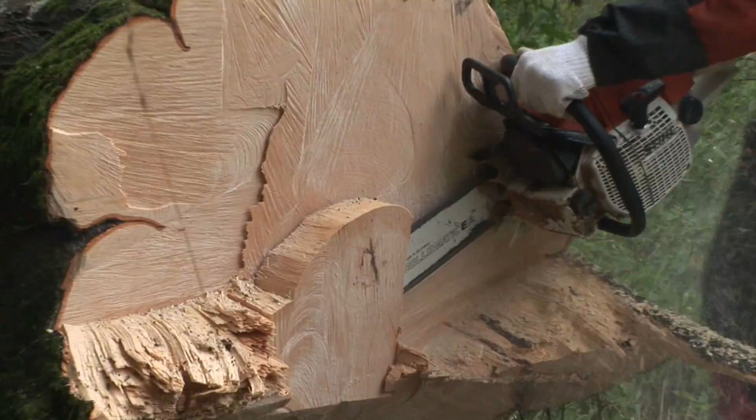Plant photosynthesis is using the sun as a kind of engine to form an organic substance, which in the form of wood was man's original energy source. This substance is biomass that since our prehistoric times has given the inhabitants of Earth energy to light, heat and cooking. Biomass, such as wood, has been used for energy purposes ever since mankind learned to control fire.

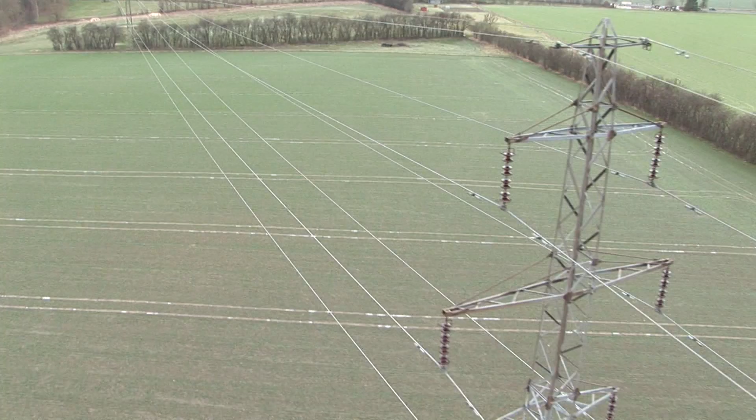And biomass is renewable because we can always grow more. 80% of the global supply of renewable energy is derived from biomass, and it represents 12% of our total energy consumption worldwide. 12% is also the figure for the gross inland energy consumption of the European Union that is to be covered by renewable sources of energy by the year 2010. To meet this goal, intensified use of biomass needs to be made both for heating purposes and for power generation.

But biomass is still not a word that is commonly known. Very few people would actually know what it really was. But then when you started to say, it is the sort of products of farming that can be used, they will all know what the products of farming are. I mean, they're all very familiar with straw, they're all very familiar with wood shavings and even energy crops, of course. But biomass is not a word in particular that's commonly known.

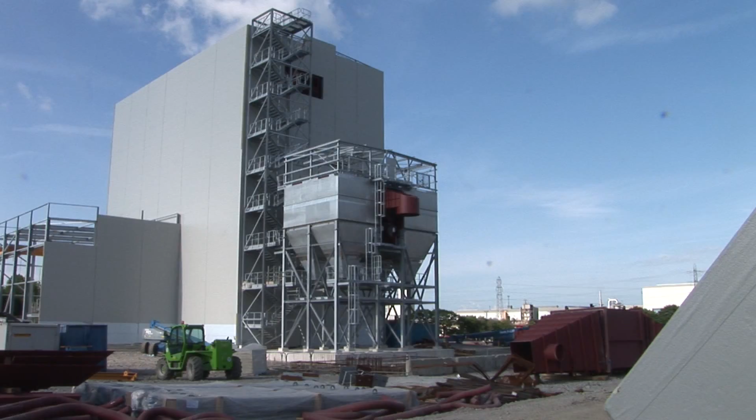The past uncertain factors surrounding the use of biomass for energy purposes are now virtually eliminated. Therefore, the way for transformation has been paved, and the optimal use of biomass has a significant impact on energy, agriculture, environment, economy and employment. Several biomass plants have now been established in large parts of Europe in both public and private ownership, and the development of better construction continues at a high pace.

Among the renewable energy sources, wind and biomass are the two with the most potential. All of the other renewable technologies to date are intermittent. They follow their resources. Wind will be intermittent, solar will be intermittent, hydro will be intermittent. This is a nice baseload technology which can be relied upon very much.

The one thing you cannot do with the wind is to guarantee that it will be there when you need it. The other thing, because it's baseload, for the same amount of capacity, you actually get far more electricity. And we're finding that roughly a factor of 3. I mean, the same capacity biomass can produce 3 times the energy of the same capacity wind farm.

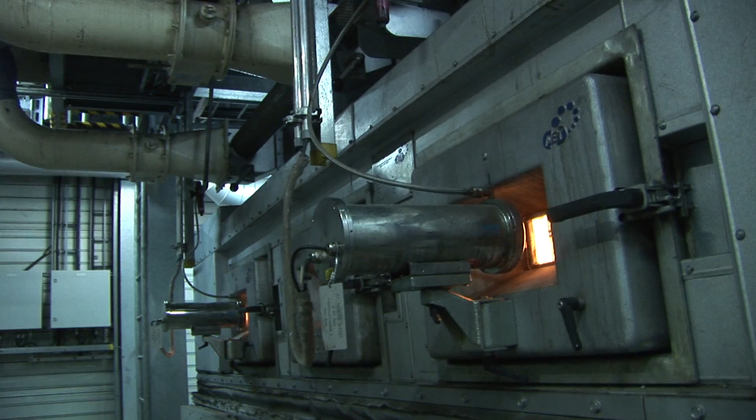Biomass can be converted into electricity and heat. Compared to the fossil fuel sources, it can be much more evenly distributed. Over the last 10 years, more than 100 biomass-fired power plants with high efficiency and reliability have been built in Europe. Combustion is the most widespread biomass conversion technology for energy purposes, primarily for heat generation. This typically takes the form of either combustion plants providing heat for individual consumers or facilities supplying heat to district heating schemes.

Power generation from biomass combustion is usually steam-based, utilizing steam turbines for the conversion to mechanical energy. The large investment cost associated with this technology makes it less attractive for small-scale installations, and it is therefore mostly applied in relatively large plants. Frequently, it is operated as co-fired schemes, utilizing biomass in combination with other fuels, for instance, coal.

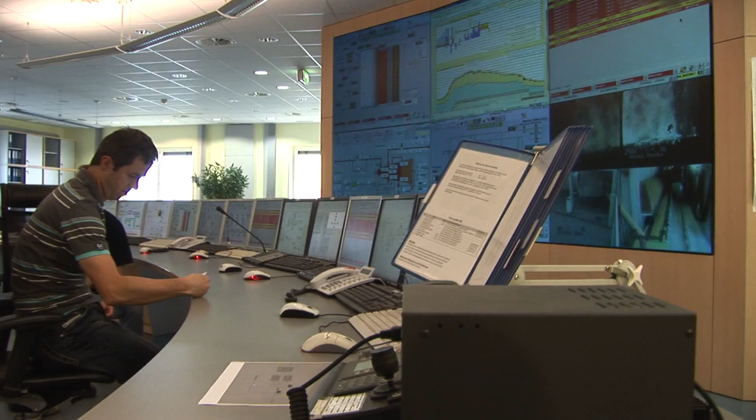For power generation, as well as cogeneration schemes on a smaller scale, alternative routes are being pursued other than the combustion and steam turbine combination. Usually, the objective is to convert solid biomass into fuels that can be used in engines or gas turbines. The EU described its targets for renewable energy in the EU White Paper on Renewable Energy Sources, published as early as 1997.

A major barrier to increased use of biomass is based on price policy between fossil energy sources and biomass, as well as in tax structures across Europe. Despite the barriers, there has been a tremendous development in biomass utilization.

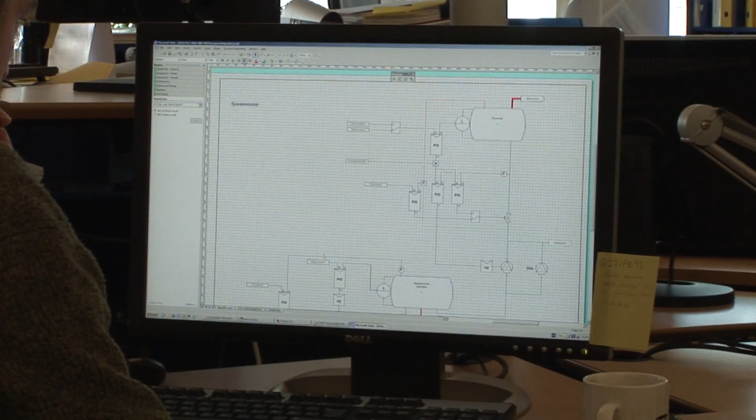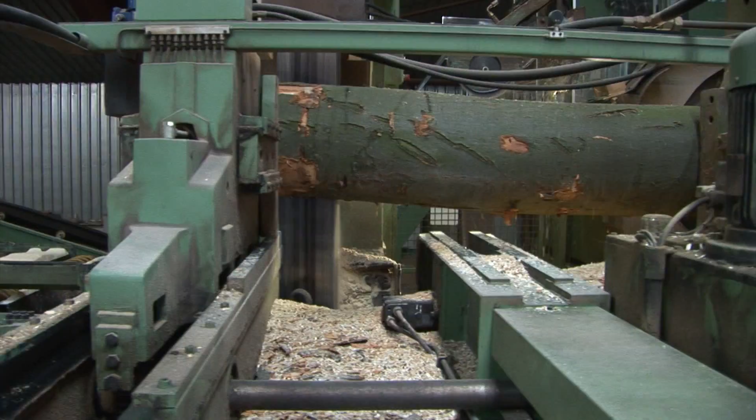One of Europe's most active and productive centers of energy science is located in the northern part of Jutland in Denmark. The company Aalborg Energie Technik has developed a massive knowledge base that ensures the design, sales, construction and startup of process, steam and cogeneration plants. These plants are primarily fired by all kinds of biomass, including wood chips, wood waste and wood dust.

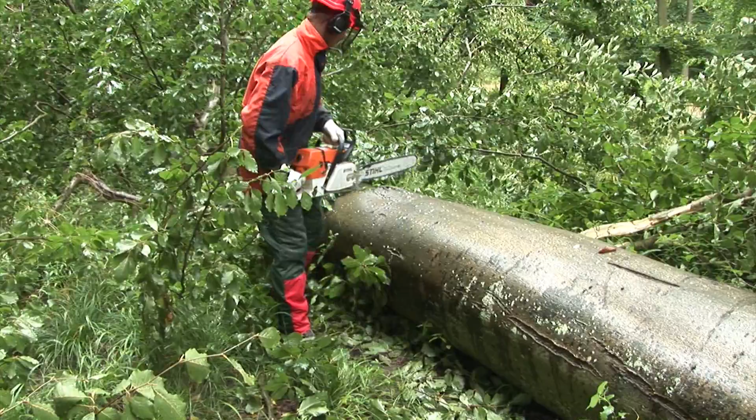In most countries of the European Union, wood plays only a minor role beyond its traditional use in rural areas. Scandinavia and Austria are the exception to this rule. For instance, the town of Linz started up the largest biomass facility of Austria in October 2001, thus making a sustainable contribution to improving local air quality.

In Austria, the introduction of small-scale biomass district heating plants has been a resounding success. The Austrian government has backed the use of biomass derived from industrial wood waste and wood from forestry. Using wood as a fuel is the most efficient way of using biomass as an energy source, as the cost of wood is much lower than fossil fuels used for domestic heating.

The city of Linz has 200,000 inhabitants, and we were always trying to find the energy system for the diversification of the fuel. So we were using a lot of oil and gas for the power production of electricity and district heating. Our main source for the biomass plant is untreated wood. This untreated wood is coming direct from the region.

So we use now a part of logs because we can make the transportation cheaper for the logs. Then it dries up a little bit. Then we take sawdust and all these things which are coming from the industry. And on the other hand, we also can fire bark and other rests of untreated wood. What is important for this plant, we only use untreated wood.

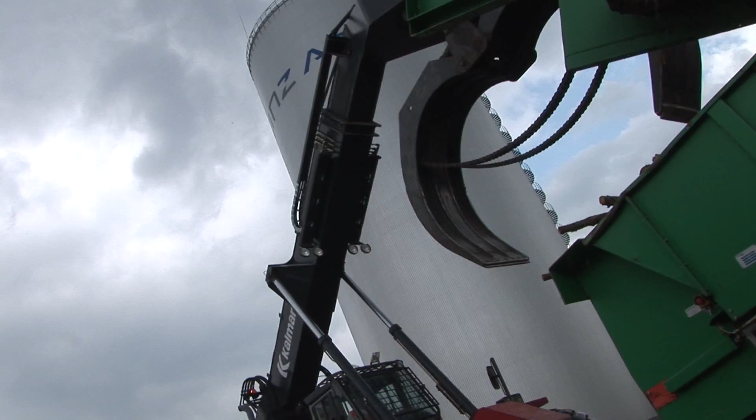We're getting the logs by ship, train or by lorry. We're bringing it to our storage area because here we have a little buffer size, maybe up to 3 months. So if there is no transportation possibility or it's in winter time, we still have the logs on our storage area. And on the other hand, it has a big advantage.

The sun and the weather is drying up our wet wood because the wood, when it's fresh, has up to 50% water content. It dries down, maybe when it's laying 1 year here, it only has a water content of 30%. So it's better for the energy production or for the efficiency using dry wood.

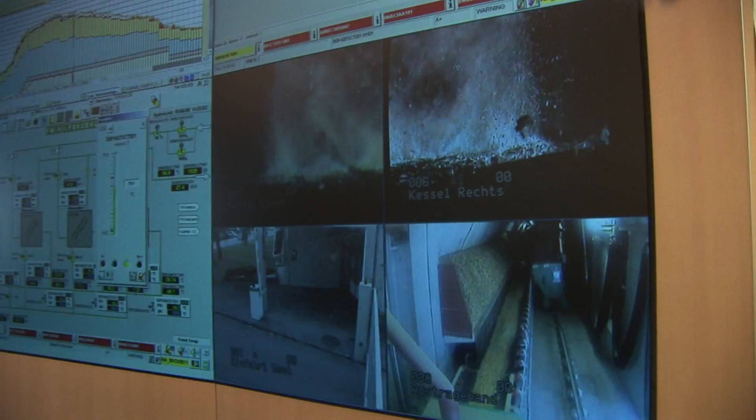So behind me you can see the control room where the plant is operated. The plant design is made for a full automatic operation of the power plant. Total production of district heating from this plant is about 200 gigawatt hours, and we are producing more than 65 gigawatt hours of electricity. So in total we have 20,000 customers in the city which are only supplied with this bioenergy from this new plant.

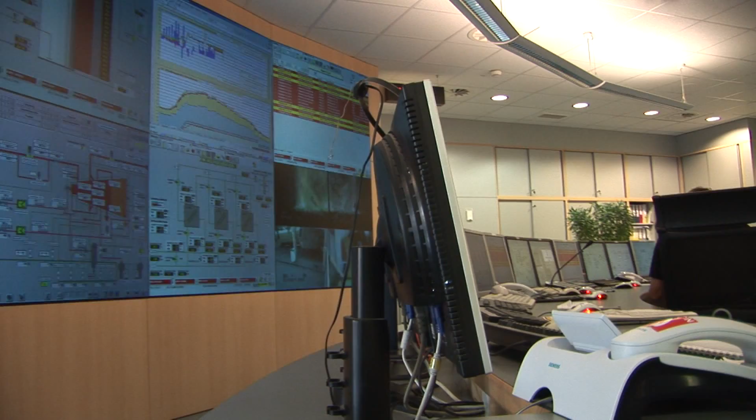The collaboration with AET was very good. AET had won the contract against other plant manufacturers or designers in Europe. At the end, we tried to get a plant with a high efficiency. It was a very professional project management, and engineering was done in Denmark by AET.

In Germany, disagreements on the definition of biomass, mainly concerning the utilization of used wood and technologies, led to insecurities for the development of the biomass sector. But the country's 2001 regulation of biomass defines the different materials that may be regarded as biomass and the technologies for its utilization.

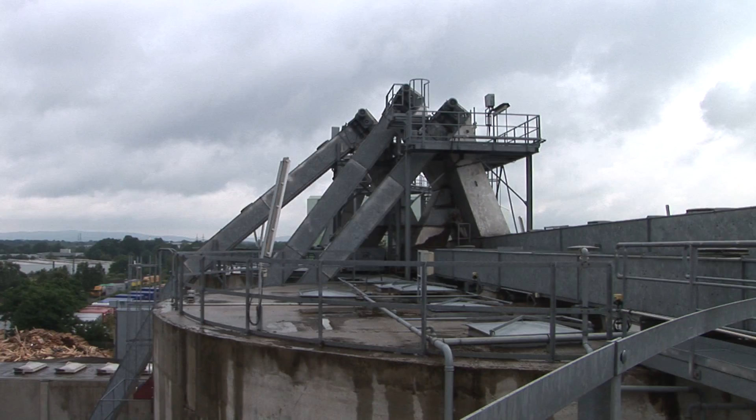The Gütersloh plant has an annual input of approximately 120,000 tons of wood chips, wood waste, demolition wood, bark, saw and sander dust. The plant was commissioned in 2000. AET was a turnkey supplier of the fuel handling, the boiler plant and the flue gas cleaning system.

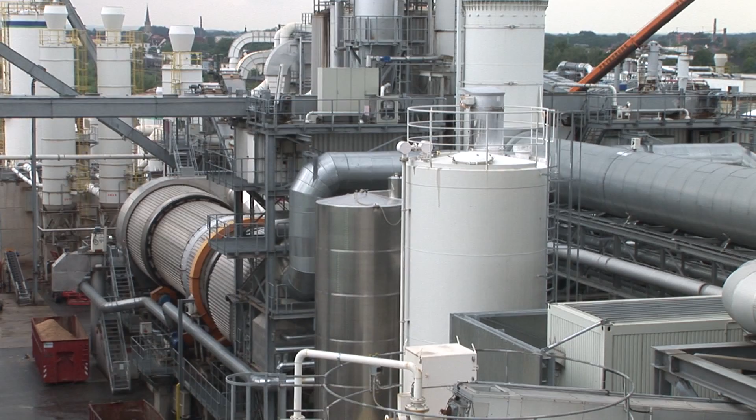Before the start button can be pressed in and the use of biomass to produce electricity and process heat may begin, a cogeneration plant must be built. But before the first turf of the construction can be cut, a large number of complicated tasks must be solved. The entire project development starts with feasibility and profitability calculations. Alongside, the application for the environmental permit must be designed and submitted.

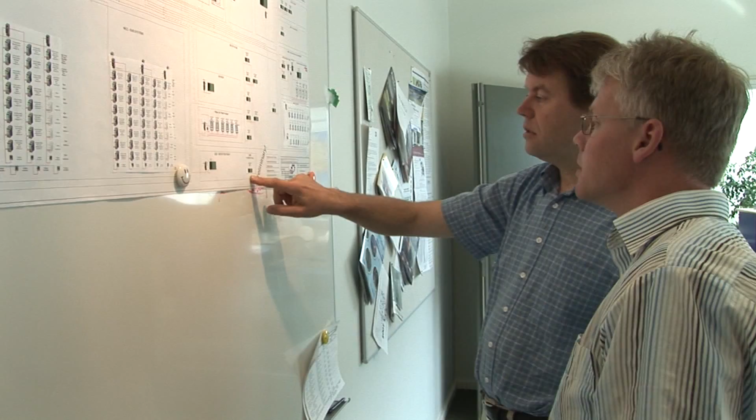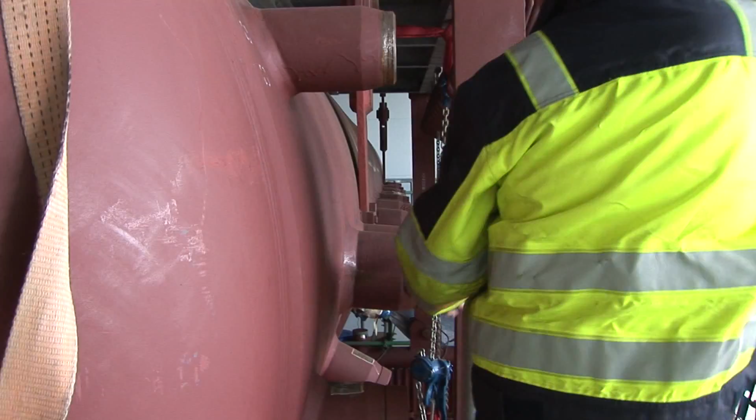Unfortunately, it is in most places a long and labor-intensive process to obtain a building permit. Many projects will not be implemented because the building license cannot be achieved. But many others can be carried out, and the highly trained team of AET master all the disciplines which guarantee safe, reliable and profitable plant operations. AET has since 1997 been experiencing a steady growth. The reason for the success is the exploitation of the unique capabilities that exist in the company.

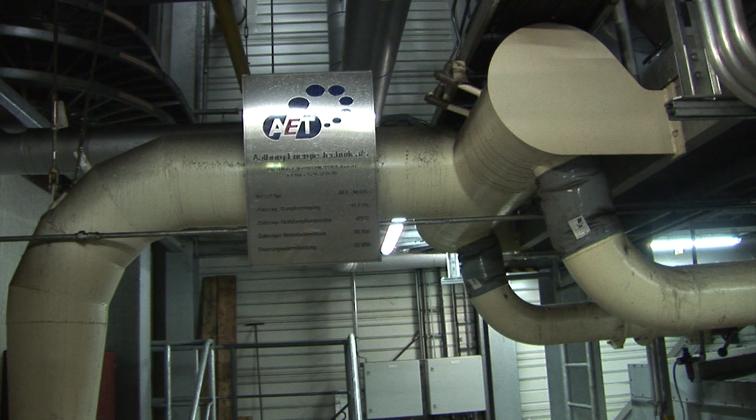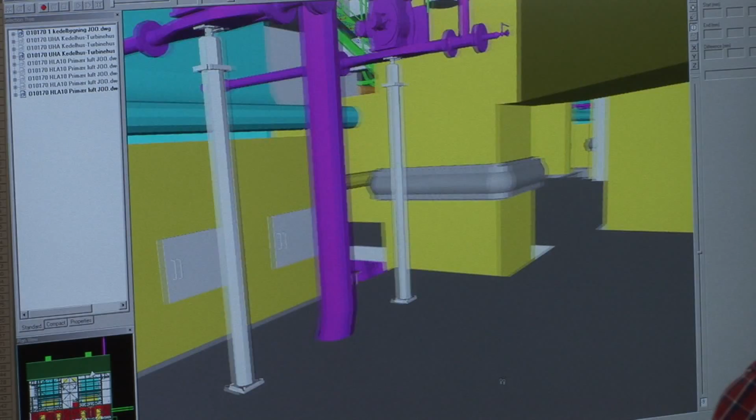All the way through a project, we try to keep in close contact with our client in order to help him get the best possible plant as the end result. Quite often in the course of a project, some conditions will change, and this may require finding new solutions at short notice. And a close relationship with a client that's built on trust and openness and honesty usually makes it easier to make the necessary decisions.

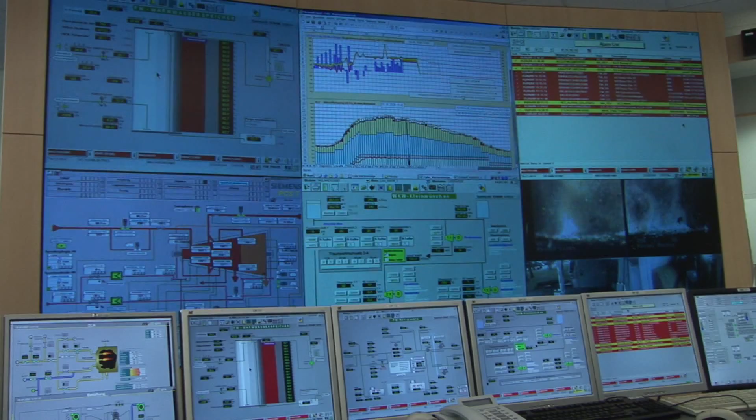Of course, sometimes we disagree with our client on some points, but we try to not let that slow us down in what is our main task, which is to ensure that the client gets a good and well-functioning plant on time. We'd rather find a working solution here and now and then take the argument later. It's usually easier to find an understanding when the plant is working well. And sometimes this approach costs us some money, but we usually end up with a satisfied client.

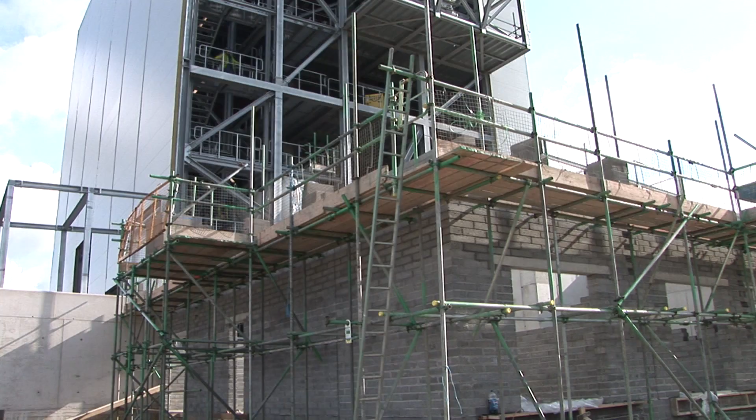Wales is rich in coal. It has been burned for centuries. Burning coal is the main reason why Britain has emitted more carbon dioxide per head of population than any other country. But coal is not the only energy source in the country. This plant, which is now fully operational, is the first commercial-scale biomass renewable energy power station in Wales.

The wood combustion plant, sited in Margam, Port Talbot, generates enough energy to meet the needs of 31,000 homes. The plant itself burns 160,000 tons per year of clean wood, a large proportion of which is supplied from managed woodland in South Wales. By burning this sustainable fuel, some 47,000 tons per year of carbon dioxide from fossil fuel are avoided.

This is the first dedicated biomass plant in Wales. The only other project is a coal-fired power station that's taking in a proportion of wood to mix in with coal under what's known as co-firing. But this project will take 100% wood as fuel. It has to be clean wood under the consents we have. We're not allowed to burn any contaminated material. And that clean wood, 60% of it will come from the Forestry Commission under long-term contracts that we have with them, taking combinations of roundwood, chips and brash.

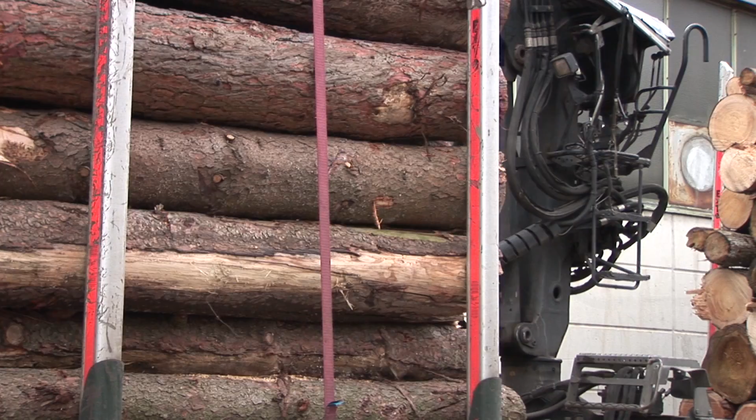We're not allowed to burn contaminated wood. There is a directive under European law known as the Waste Incineration Directive. To burn contaminated wood, you would actually have to comply with that, and rightly so, through earlier concerns on burning of waste and contaminated waste. There are very strong emission controls on such materials. Our consents for this project do not allow us to do that, so it will be all clean wood. What we're taking is the thinner stems, diseased stems, twisted stems, maybe even fire damaged stems, and it's all coming from material that formerly didn't have a home.

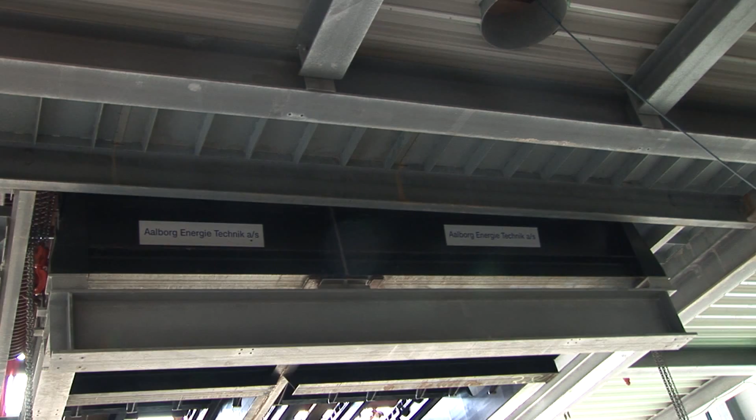The plant was designed and constructed by a consortium consisting of Aalborg Energie Technik and Burmeister and Wain, a Scandinavian contractor. AET has delivered a number of projects in Central Europe and is focusing on biomass handling and combustion processes.

Our combustion concept is based on a spreader stoker and a travelling grate, which is a technology with roots back to the years between World War I and World War II in the US. But we've continuously developed and refined this technology such that today it's one of the most well-suited technologies for biomass firing.

It's a very robust technology, it's flexible and can be used for many different types of fuel. It also gives us the possibility of achieving very low emissions and high efficiency.

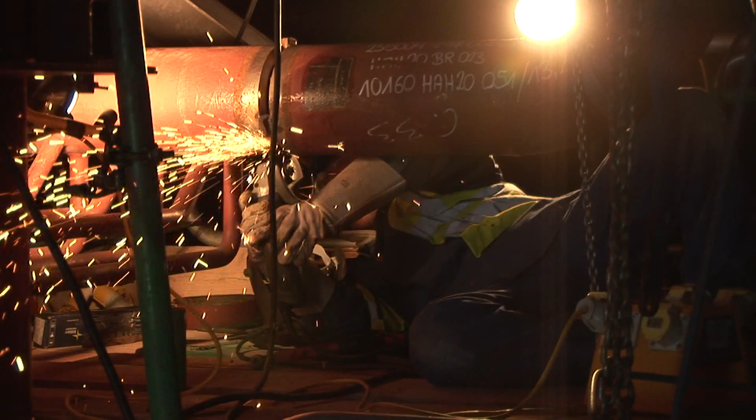One of the requirements in order to achieve good combustion with a low excess air ratio is that the air in the combustion is mixed very effectively. This is achieved by placing the air nozzles at the right places and injecting the air with a very high velocity.

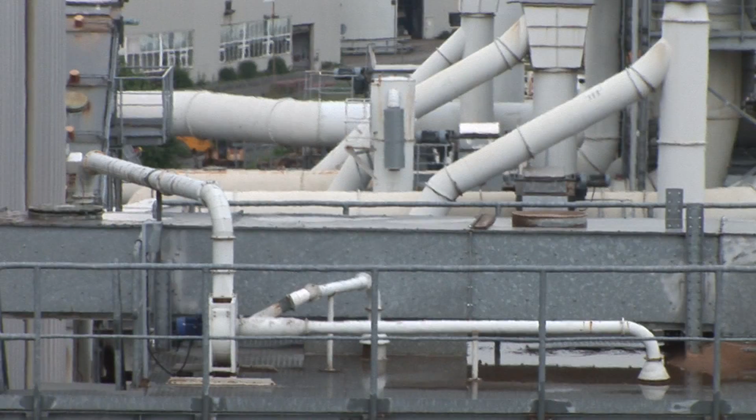Another advantage in having a lower excess air ratio is that we send less heat up the chimney because the amount of flue gas is simply smaller. A smaller heat loss is good for the efficiency of the plant and also for the operating economy of the plant. It also means less pollution of the environment.

The operational team should be a core of about 17 people. The maintenance actually will be done by the builders as well. We've actually been lucky enough to secure not just a construction contract with them, but a maintenance contract with them.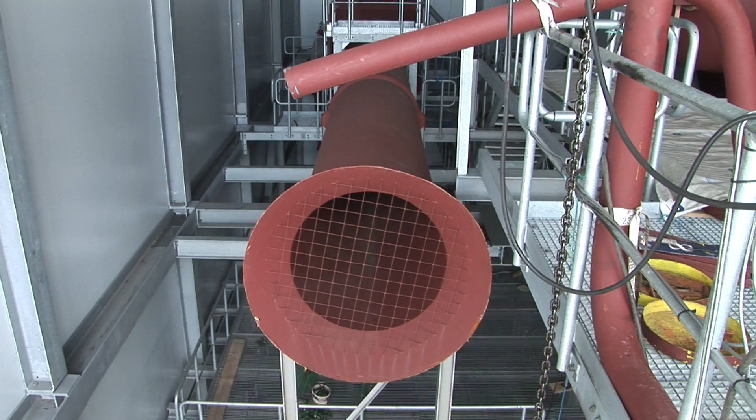And that really helps, because what you can get with biomass projects, or any form of project actually, is if you get a fault shortly after completion of building, the operator will blame the builder, and the builder will blame the operator. It actually removes any of the interface problems.

But it's not enough to get each subsystem working. The systems also have to function well together as a whole, and that's why we put a lot of effort into integrating individual systems in the overall plant. Especially the coordination of interfaces between various subsystems is important, and part of the task is to build good relationships with our suppliers and make different sub-suppliers work well together.

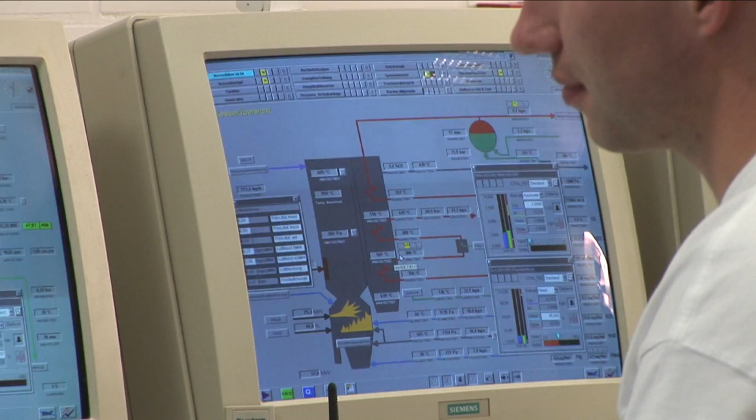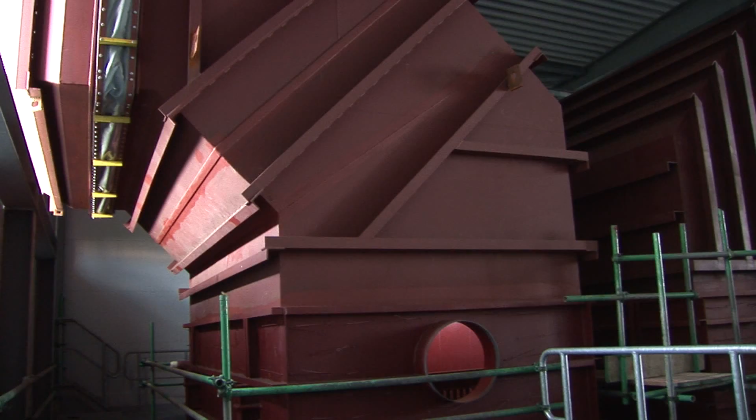It is easy to be convinced about the great perspective of biomass-fired power plants, but questions keep turning up, like why is biomass sustainable and why is it a renewable technology? The reason is that it's actually taking the carbon out of the atmosphere almost immediately before it's burned.

We're actually recycling carbon on a very short time scale, whereas if you burn fossil fuels, you're putting carbon back into the atmosphere that was in the atmosphere millions of years ago, so you're actually adding to existing carbon. Biomass doesn't do that. It's recycling existing carbon, and there is a small amount actually captured in the roots which don't get burned anyway, which means there is an overall benefit. And of course, while you're generating electricity, it's stopping the burning of fossil fuel as well.

The use of biomass as an energy source is perhaps the most mature technology used by man, beginning with the controlled use of fire.

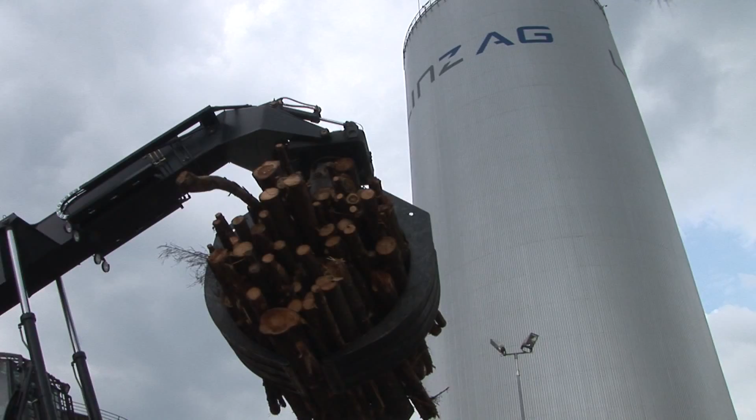And there remains a big market for biomass-fired power plants in Europe. The focus on biomass is quite intense at the moment. If you think about it, they're looking at some form of renewable heat obligation. I think most of the European countries are looking to use heat as a renewable resource, and if they're going to do it, it's principally going to have to come from biomass.

Europe has a renewables transport obligation and transport aspirations, and again that will have to come from biomass, and traditional power itself will have to come from biomass. So in terms of the energy sector, biomass will play a very, very big part in the future.